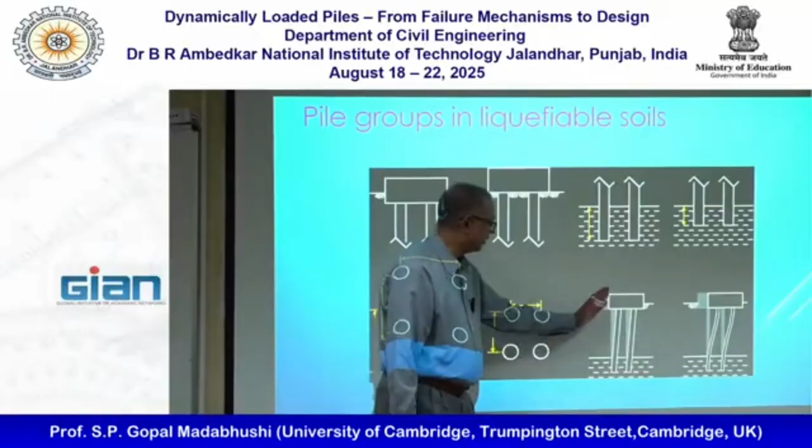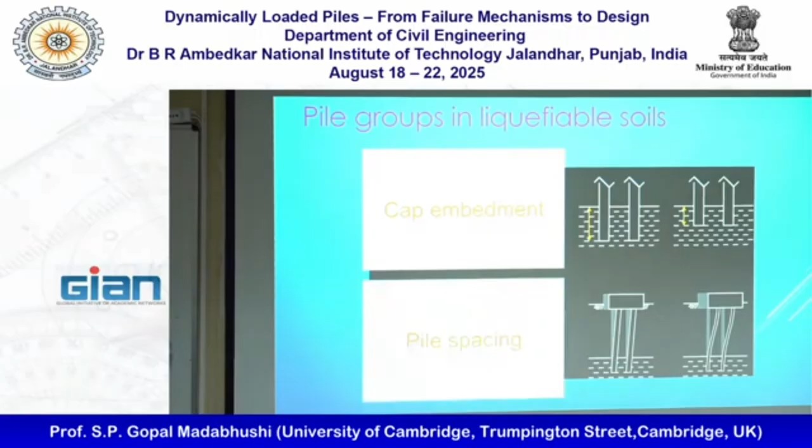Pile groups in liquefiable soils have many different issues. For example, whether my pile cap is above the ground surface, resting on the ground, or embedded will make a difference. The amount of embedment also makes a difference. Spacing of the piles makes a difference, and depending on the spacing, you can get whether the whole pile group will rotate or it can bend. So is it the flexural stiffness that is important, or global rotation that is important? All these things change depending on spacing of the piles: cap embedment, pile spacing, tip embedment, and pile stiffness.

Before I get into this, I want to take you through a thought experiment. Suppose I have a pile cap and, say, a 2 by 2 pile group.

Initially, before we constructed that, when there's no liquefaction or earthquake, what do we expect? We'll have some end bearing, we'll have some shaft friction, and that is keeping the vertical load in equilibrium. This big downward arrow needs to be balanced by these two, and the integrated values of shear stress on all 4 piles.

During the shaking, liquefaction happens, pore pressures rise, effective stress comes down, and you get loss of capacities. You lose some of your end bearing, your shaft friction probably disappears fully, and that gives rise to settlements. But what we don't know is who's keeping the thing in equilibrium. We know there's an external load that's always going to be there, so somebody needs to oppose that, but we don't know who is doing that. That's why it's a question mark.

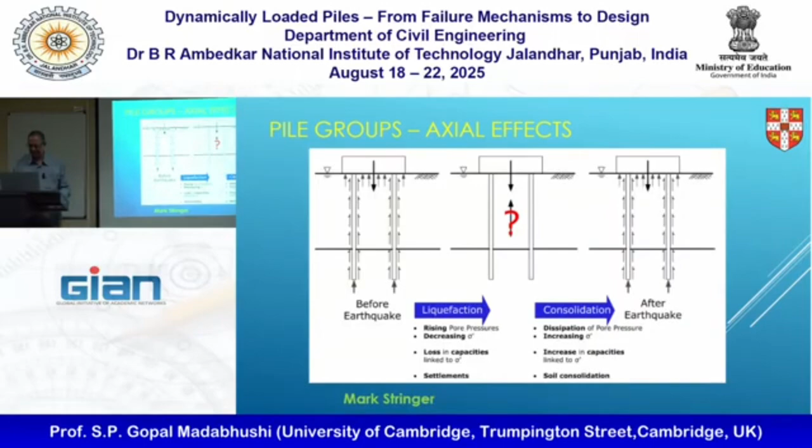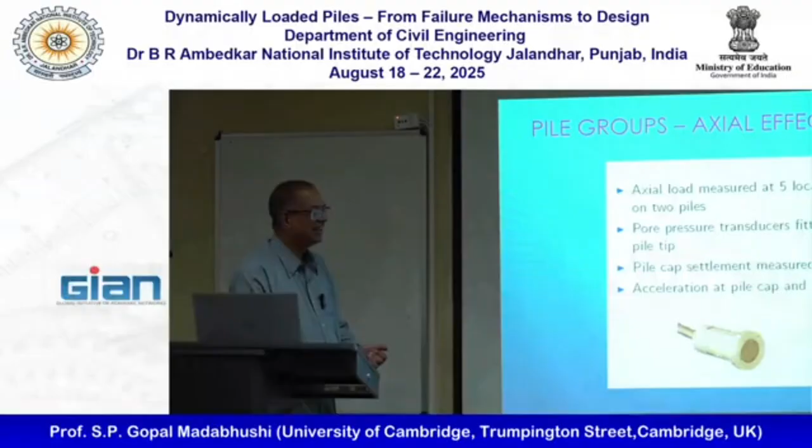I had a student called Mark Stringer, who is now a senior lecturer at Christchurch University in New Zealand. Mark was a gem. He used to work for BP, and got tired of sitting alone on offshore jackup rigs, and said, "I want to come back and do a PhD." I said, "I have this idea, do you want to try and do research on this?"

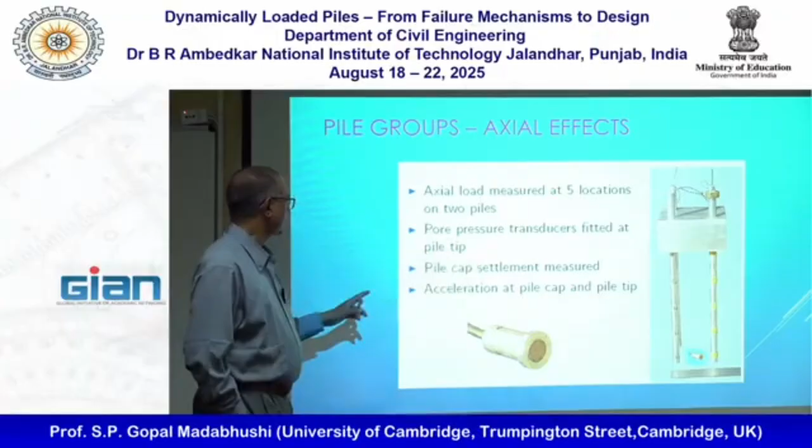So he created this pile group. The base had a pore pressure transducer in it. We had gauges all along, but these strain gauges are designed to measure axial loads, not bending. So we had axial load measurement at 5 locations, and we also had total load cells on top. We of course monitored the acceleration of the pile cap and the pile tip, and the settlement of the whole pile group.

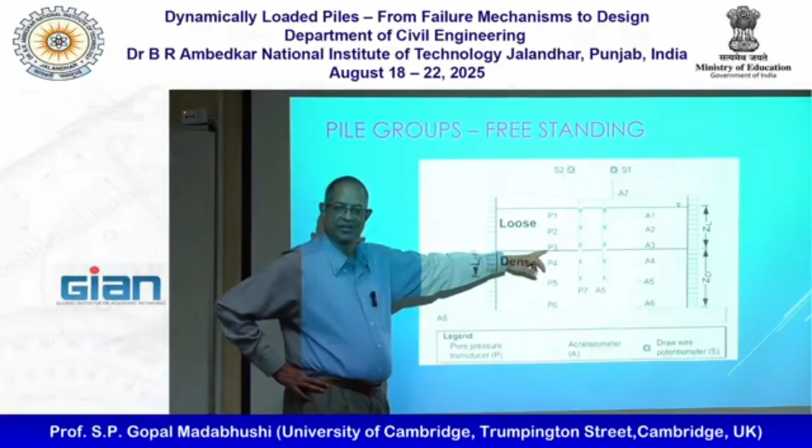The first set of experiments he did involved inserting piles into a soil profile of loose sand overlying dense sand. This is very realistic because you'll never design these piles to end up in just the loose sand - that's asking for trouble. You will always embed them to a certain depth. Normally you work out the effective length you need using, I think, Bond has one equation, Fleming has another equation, that tells you how deep to go - maybe 5 pile diameters or 8 pile diameters into the dense sand. So we followed those rules and installed them to that depth.

And here are all the load cells, effectively load cells. They're strain gauges, but they're measuring axial load.

S1 and S2 are the wire gauges to measure the settlement. A7 is the accelerometer. We measure pore pressures and accelerations on either side.

Very straightforward, the first set of experiments had the pile cap clear off the ground, with a gap at ground level. Normally onshore you don't do that. The pile cap is either on the surface or embedded into the ground. But offshore, many times you leave the pile cap a little free because you may not be able to drive the piles to the depth you want. So it's not totally made up - it's possible, especially offshore, to have a situation like this. We wanted to try that and compare it with when the pile cap is sitting on the ground. So these are what I call freestanding, meaning the pile cap is clear of the ground surface.

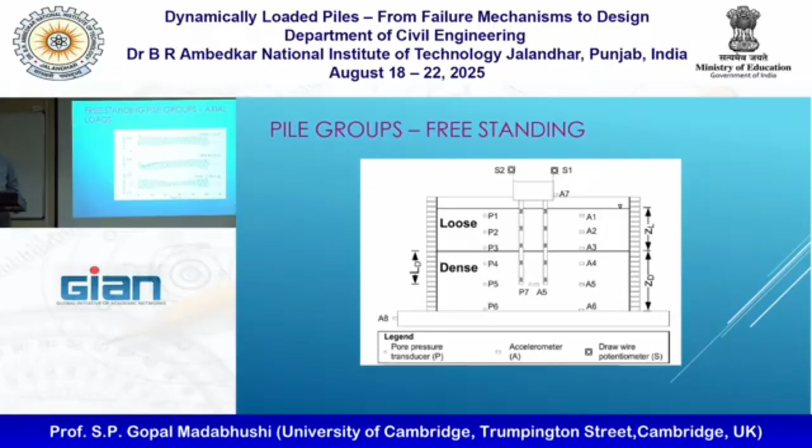Before we look at the shaft capacities, we're also interested in how the load is being generated. Pile loads are seeing increasing load as the pore pressure dissipates, right? So we had...

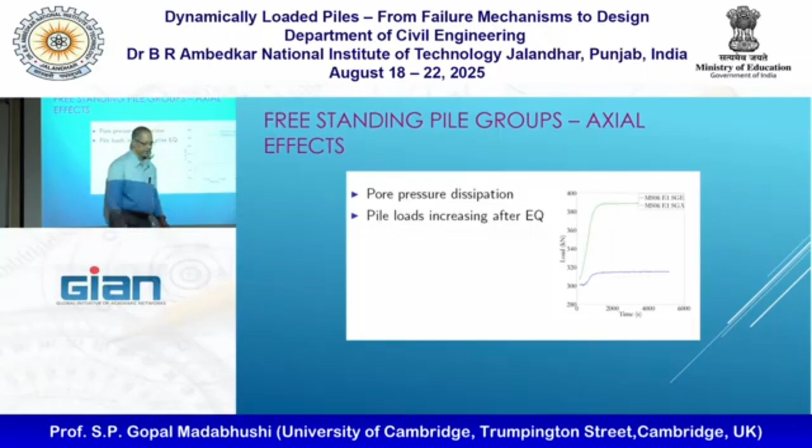Here the cyclic bit is removed and we're only looking at the fairly long term - these are like 4,000 seconds or something, and you can see the green is a lot bigger than the blue, and blue is at the bottom. Let's go back and check that - oh, I haven't marked it here, but I'm pretty sure one is at the top and one is at the bottom.

As the pore pressure is dissipating post-earthquake, we can see these loads are peaking. We can also convert this into the end bearing and the shaft capacities directly, because we know the area of the pile. So clearly during shaking we lose shaft friction, and as the pore pressure dissipates, is the shaft friction coming back or not - that's what we're looking at here.

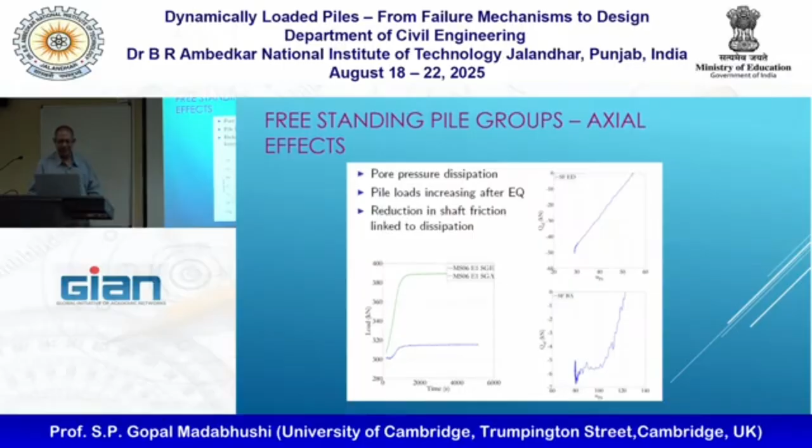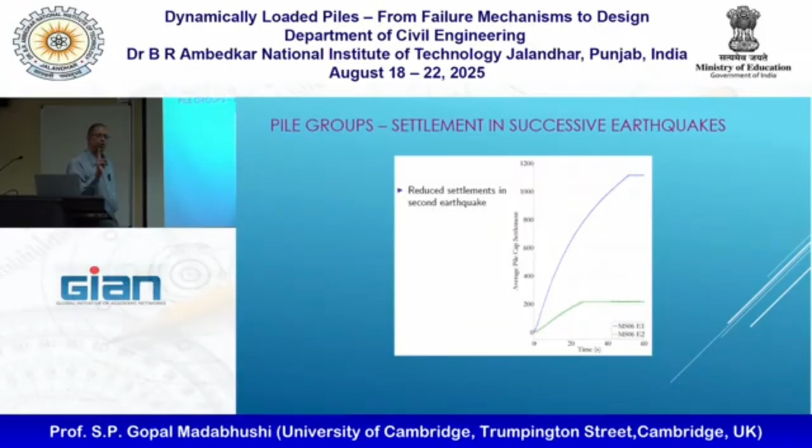Another important thing here is the settlement, and here I'm showing data from two different shakes. Earthquake 1, where I got a massive amount of settlement, nearly 1,000 - almost a meter and a bit. And the second earthquake, similar size, but the second time round the soil doesn't liquefy as much, and also the pile cap has settled a lot, so it may have come into contact with the ground.

But what I'd like to see is - this is much steeper than this, right? So we had an idea: suppose instead of stopping earthquake 1 here, if we continued, what would happen? It would probably be basically what earthquake 2 is, isn't it? We stopped and applied a second earthquake - how is the settlement going to continue?

So I need to stack these one after the other, and this is what happens. This is really beautiful - earthquake 1, the settlement stopped here, and if I put the settlement I got in earthquake 2, it's almost continuing the same thing. There's no field data, no real data like this.

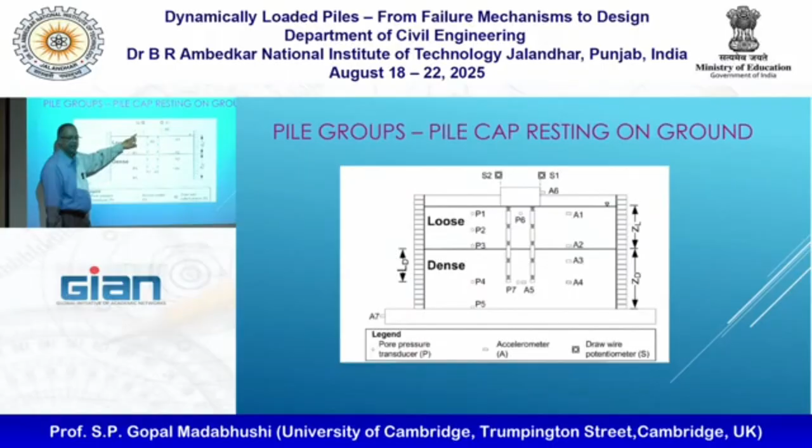In most liquefaction problems, input motion is actually not that important. Once you hit anything above 0.1 g, the soil will liquefy. Whether you do nice swaras in music, or sing different ragas, the soil doesn't really care. It only needs that 0.1 g as a threshold acceleration. After that, it liquefies. You can apply Kobe motions. For liquefaction problems, the input motion shape is not that important. For dynamic problems it is, but for liquefaction it isn't, because the soil liquefies and the structure does what it does.

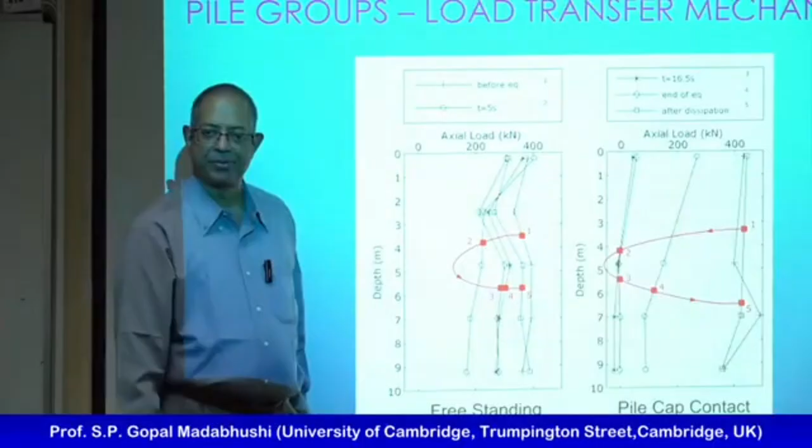When the pile cap is in contact, starts at 1, comes all the way to 2, 3, 4, 5 is the recovery - this is the post-earthquake reconsolidation. And these values are pretty close to zero. I said, what's going on here? Basically, this is the same data as what we have seen before, except now we are plotting the loads along the length of the pile.

And then the penny has dropped in our head. Basically, if my pile cap is not in contact with ground during this particular earthquake, the total load being applied on the pile cap - somebody has to carry it, right? So it can only come down to 200 because that load has to be carried through all the elevations of the pile.

Whereas when the pile cap is in contact, the piles completely don't carry any load. So who's carrying the load? The pile cap, right? So whether the pile cap is free or in contact makes all the difference on the load the pile is going to see. From equilibrium consideration, this is right, because somebody has to support the load. Whereas here I got the pile cap to carry all the load, so the piles are completely unloaded during the earthquake.

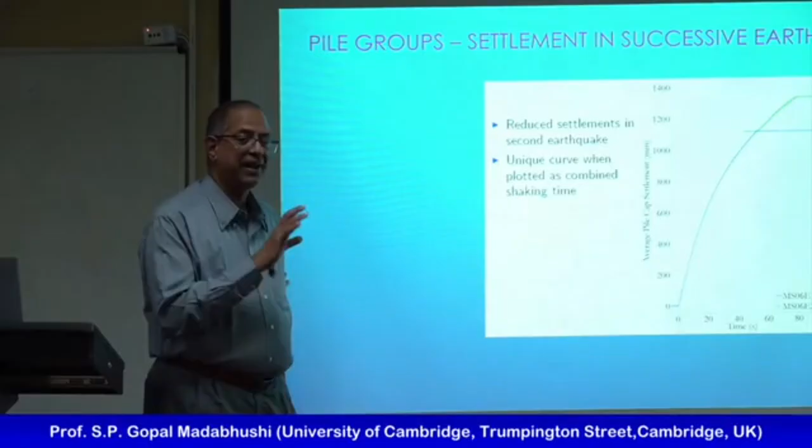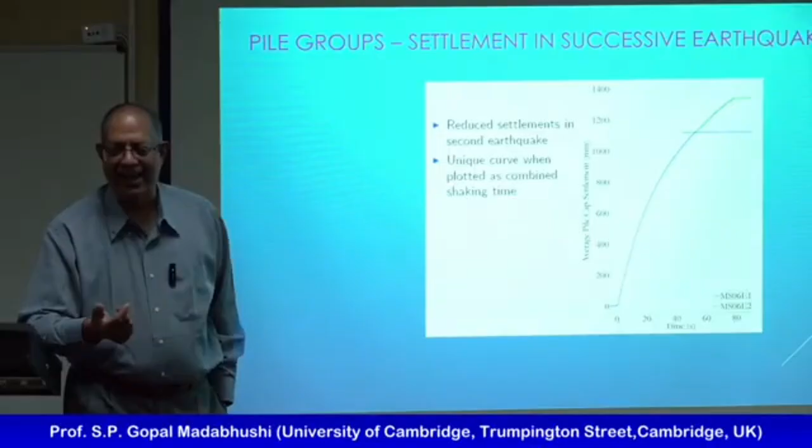If I have my freestanding pile group where the cap is away, the piles are carrying 200 kilonewtons in liquefied soil, which means that they will mobilize a lot of settlement. That's the only way it can generate enough resistance to support the load. Whereas the other one, the settlements will be a lot less.

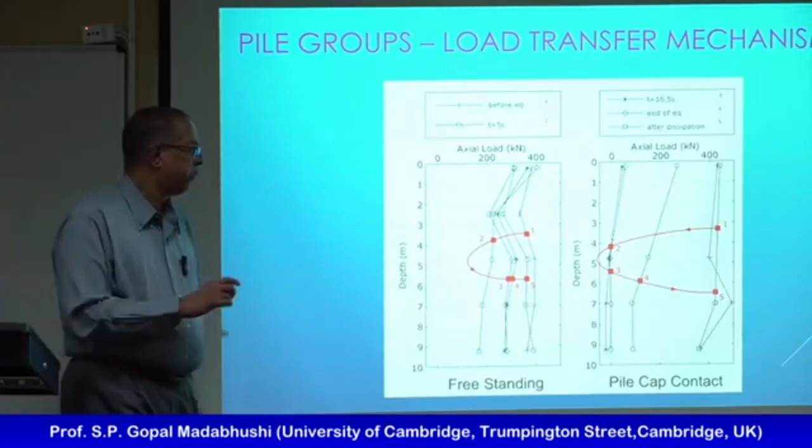And this is quite a revealing set of experiments. So here the settlement will be less, but you are basically relying on pile cap.

So what routinely designers are ignoring is what is saving them when this ground liquefies. And there are many examples where routinely, if you have liquefiable soil, you drive piles to go into dense sand below. Even Delhi's Akshardham temple had piles like this. So many examples I can give.

So when the earthquake happens, the bit they ignored in their design is what is going to save them, which is a bit scary. Because as a designer, you are saying, this is not going to be important for me, and I'm going to ignore the pile cap capacity.

And that is the bit that is actually holding your structure up when the cap is in contact. Otherwise, if it's freestanding, you'll get a lot more settlement, like 1.5 meters, by which if I got 1.5 meter settlement of pile, my structure is more or less destroyed by that amount of settlement.

Yeah, but what if it is a reverse case? Like it is pile cap resting on the soil. After first earthquake, the soil is going to sink. Yeah, and along with the pile. Not along with it only, because the pile is socketed in the rock. Then, as I said yesterday, the problem now becomes a buckling problem. If you, this is the problem with soil, right?

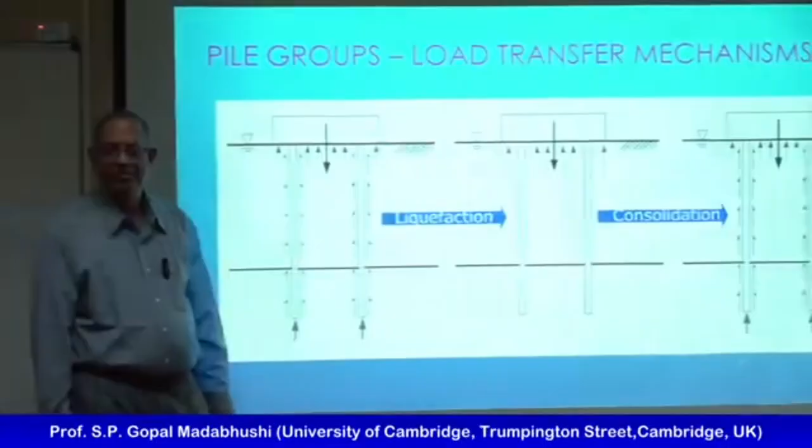So have you seen that film? Not Catch Me If You Can. They rob the bank and all that kind of stuff. Anyhow, there's a film called Now You See Me and Now You Don't. So he applied that to this pile foundation and it kind of stuck with us.

So this is really where centrifuge testing can reveal the load carrying ability of piles and how the load is getting transferred to the soil. If I now know this is what's going on, I can design. All I need to do is make sure that the pile cap has enough capacity, right? So maybe make the pile cap half a meter bigger in every direction, I'll have enough capacity.

So although we started these experiments for fun, more or less, just to see what's going on, once you get the data and look at it carefully, as I said, we went through quite a lot of thinking to go with this.

There is also a case where an early version of this data we presented at a conference in Greece, and there was this Japanese guy in the audience, and all he got stuck on was: no pile caps, the pile settling 1.2 meters, unacceptable. He stood up and walked out of the audience. And my student who was presenting this got very angry, and he said, 'This 1.2 meter settlement is not...'

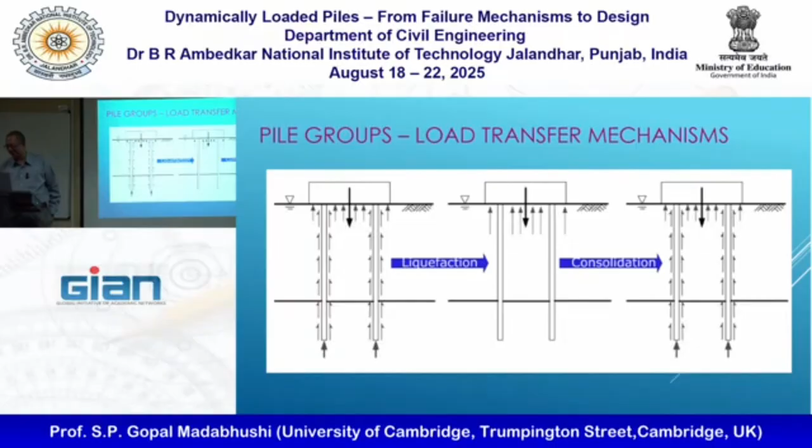Okay, any questions on the axial capacity? Did you guys find that interesting or not? Very little work is there on axial load carrying capacity of piles in liquefiable soils, by the way. Even my book - this work happened after I wrote my book, so it's not in there. There's a new book Kaynia has published, Amir Kaynia wrote, and I contributed a chapter for that, and we included this work, also published in Canadian Geotechnical Journal. So it's out there, but you need to look for it.

Any questions? Pure horizontal. Yeah. Making it inclined and all that will make it a lot more complicated.

And that's the bit I'm going to talk next. This is after the Christchurch earthquake, and I had a student called Jenny Haskell who looked at lateral spreading, which I'll talk about now. What I want to convey is the excitement of research more than anything else. This is how you can go about it, and these are all - we're not doing research for fun. These are real problems and they have real consequences.

Sir, actually, normally once it is reaching critical state, sorry, the volume remains the same. Beyond critical state, yeah. While driving itself, if you are adding more vibrations, so soil will settle? Not necessarily. When you do pile driving, what you expect is at the base of the pile, or the pile tip, that soil would have reached the critical state. In driving, because you have to fail the soil to get the pile in.

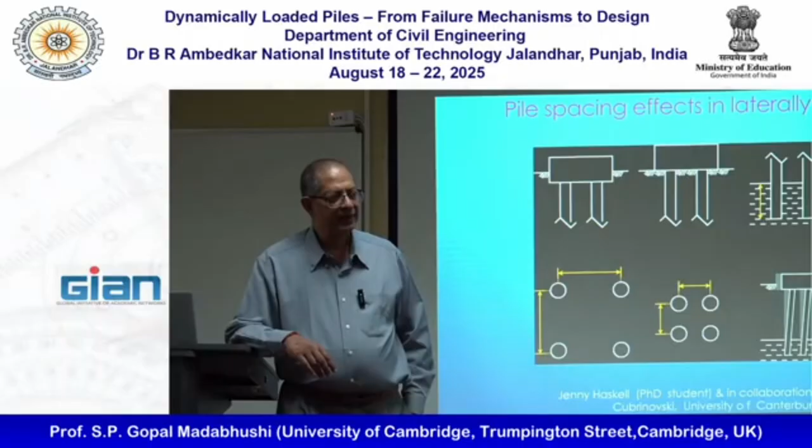Also, in pile raft design, we include the capacity of the raft in that behavior will be the same. No, pile caps are much smaller, usually only 3x3 or 2x3 pile arrangement to go under the column. Pile raft is a different beast - you got the raft covering the whole building area and you got piles. The big question is how much of the load is carried by the piles, and within that, how much is end bearing, how much is shaft friction, and how much is carried by the raft.

Now, routine static design, I also recommend pile raft for many problems, in consultancy problems in Kakinada for example, where the structural designers don't understand pile raft foundations. So whenever I say go do this, they'll say are you sure? And I say yeah, I'm pretty sure that's how you do this.

The load sharing between the pile cap or pile raft and the piles is a real interesting one. People like Randolph over the years have come up with springs, pile as a spring, the beam on Winkler foundation type of analysis for the raft. In the end there should be strain compatibility - if the raft is going to bend, the pile also needs to get pushed down, and you work on that strain compatibility between the pile and the raft.

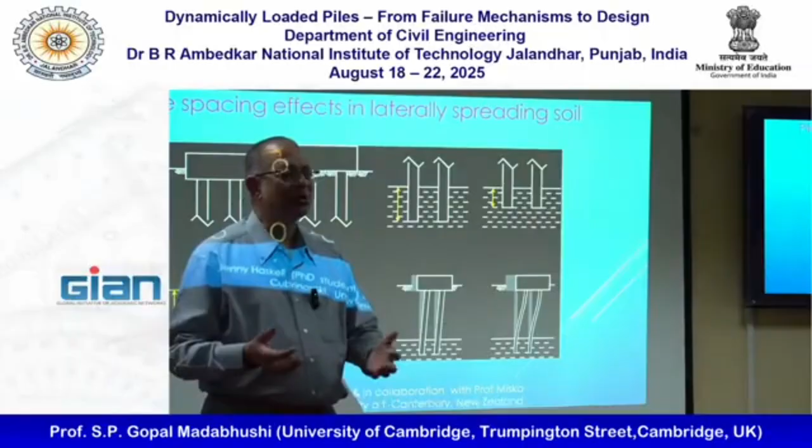Again, most of the stuff Mark Randolph has done is to do with imagining all this is elastic. Yeah, we know the soil is not elastic. Therefore there's a lot more work to be done, even for static, which he had a bunch of students work on, and he did quite a lot on that.

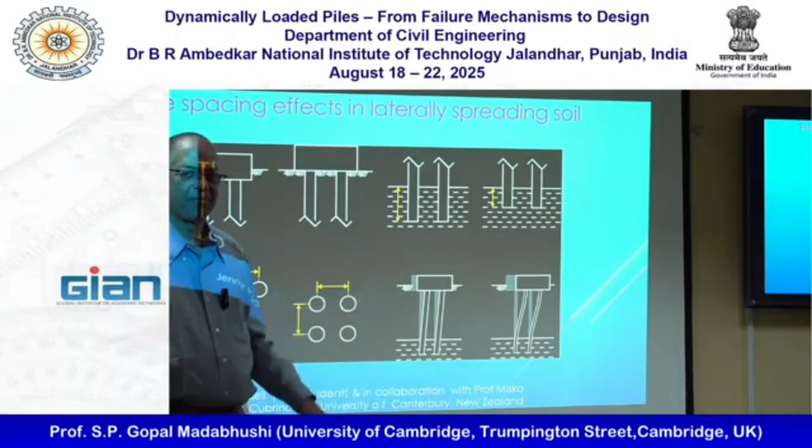If I were to look at raft foundation with piles in liquefiable soils, that is going to be even more interesting. This is just a precursor for that. So when I get a next bright PhD student, that is in my mind to go and do that. I haven't done it yet, so I can't answer. But you're right, pile rafts are a different beast, and the load sharing is going to be very interesting.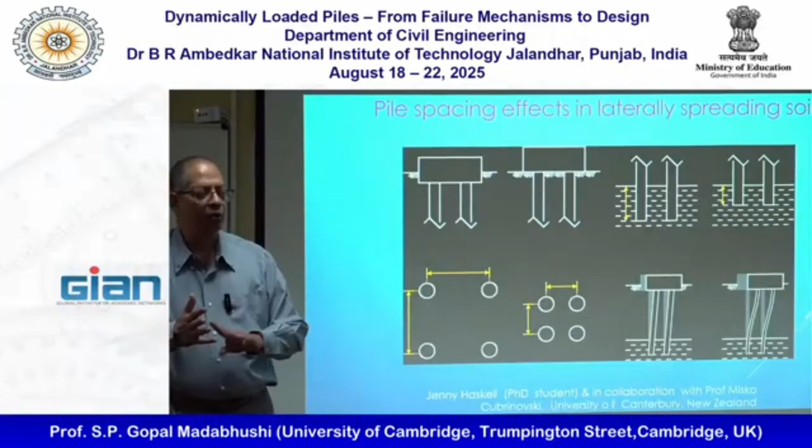So the problem is piles. Here I'm focusing on pile spacing. Typically, pile spacing is anywhere between 5D to 2.5D - that is the range. You don't normally design 10D spacing, that is almost designing like single piles. 5D is the upper limit, 2.5D spacing is the lower limit.

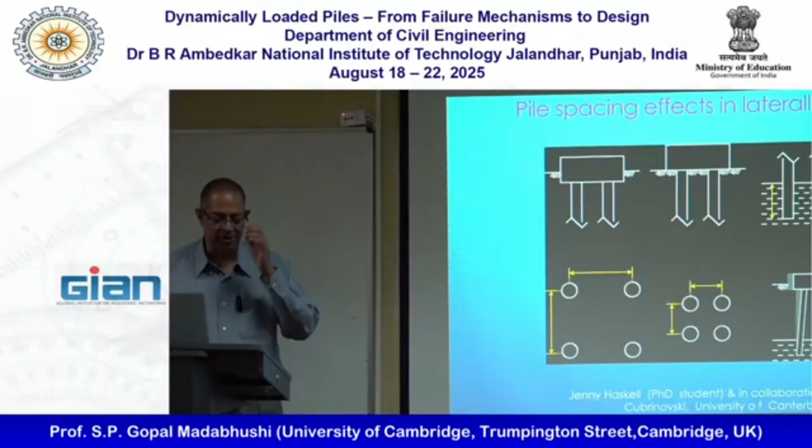So when Jenny showed up, we thought we'll look at this because as she started her PhD, this Christchurch earthquake happened, and Misko Cubrinovski was interested in this. So cap embedment we dealt with for level grounds. Now we are looking at pile spacing. The other ones we will do later.

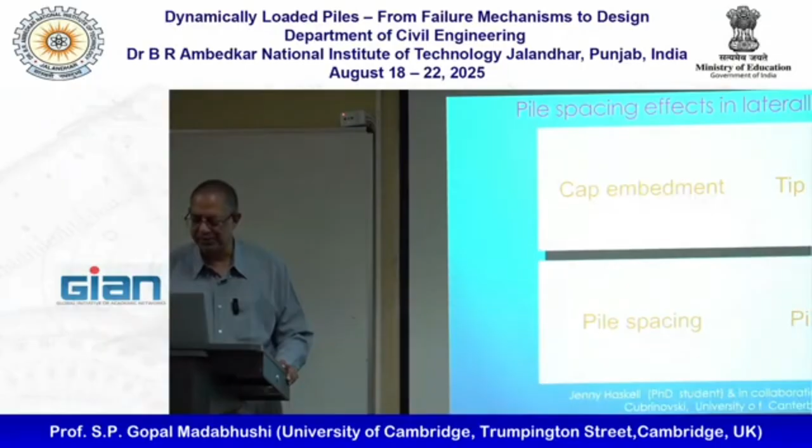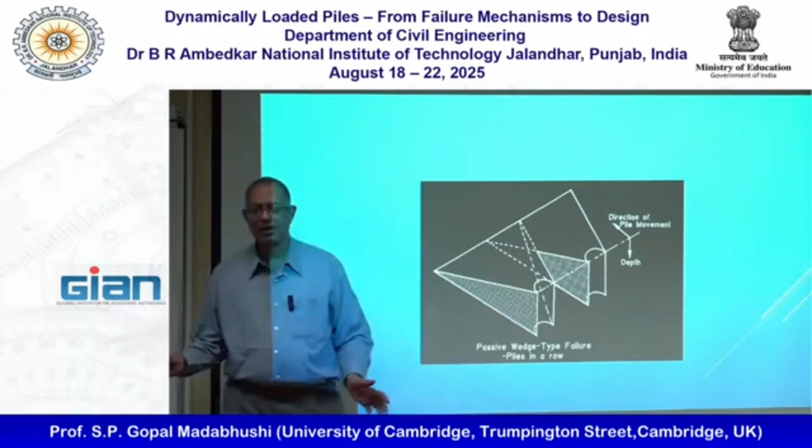Typically what you expect is that if I have piles and I have sloping ground coming, trying to spread past the pile - I showed you some field examples from the Taiwan earthquake in the last 2 days. You expect passive wedges to form behind the piles. If the spacing is close, these wedges will overlap, so the amount of load I'll attract will be less. If the spacing is large, then these wedges are pretty much on their own, so the load I attract on my piles will be big. So that is conventional wisdom.

There are also things like if the free field soil is displacing with increasing amplitude towards the surface, the soil in between the pile group may move less because most of the load is being carried by the pile. So it will flex - say if it's a flexible pile, it does something like that, but these displacement vectors will be smaller than this. We don't need a centrifuge test, we can guess this is what happens.

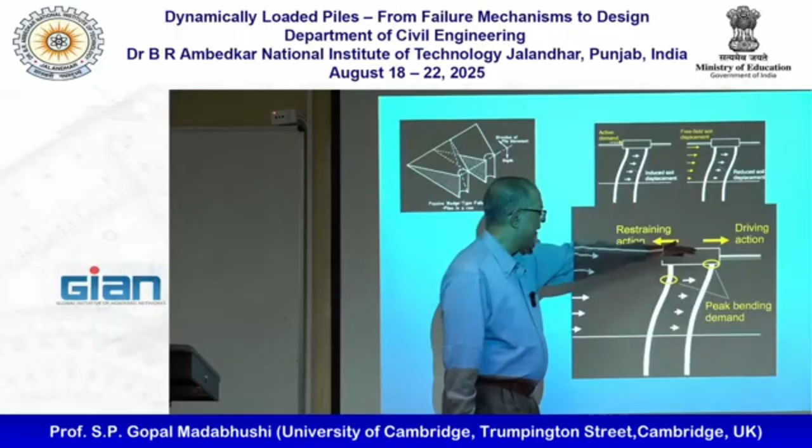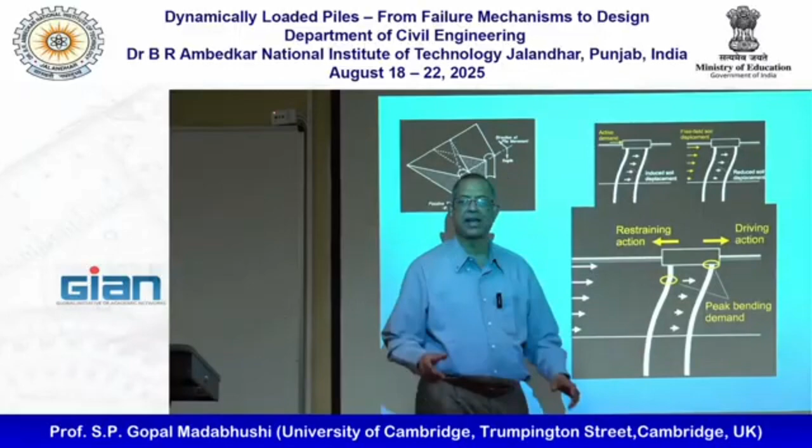Also, we talked about formation of these hinges, so we do get the peak bending moments somewhere like that, which we looked at yesterday. Effectively, the New Zealand code talks about restraining action and driving action - the earthquake creates the driving action and the structural stiffness provides the restraint. It's like a frame action, right? Basically a pile group with a pile cap is like a frame.

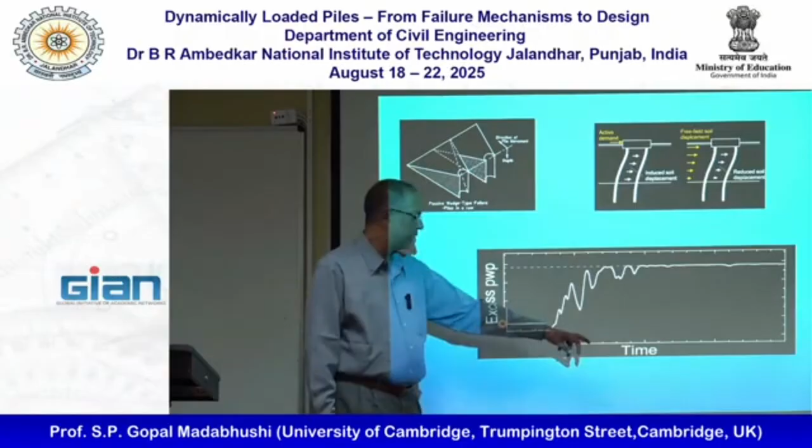Now this is - I probably showed you this already. Typically this is what we are worried about: the excess pore water pressure will, once the earthquake starts, build up and stay like that until it starts to dissipate in the post-earthquake period.

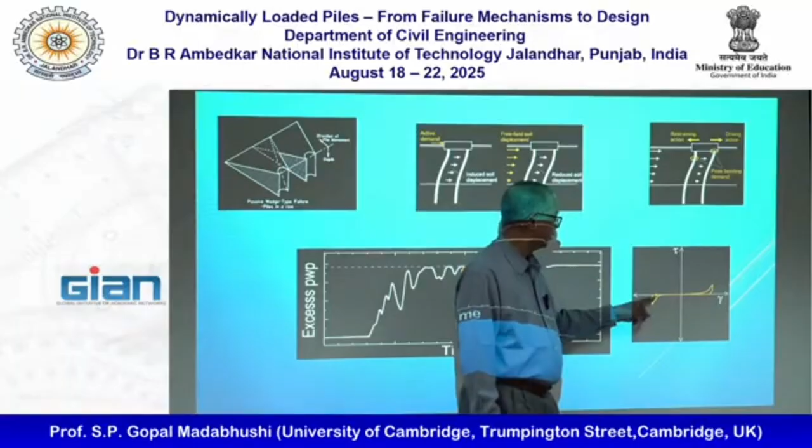So I think I showed you this animation already. You got initially stiff response, and as the pore pressure builds up, the tau-gamma loops widen up, and as it goes, they become what they call banana loops, where the tau-gamma response is almost flat, but at extremes I get dilation to create this stiff response.

So we wanted to model this in the laminar box. I needed the laminar box because when I shake this, the soil wants to move from upslope to downslope. So if my ends are even ESB model container ends, while they match the shaking, they can't deform with the soil. So laminar box is required for this kind of lateral spreading problems.

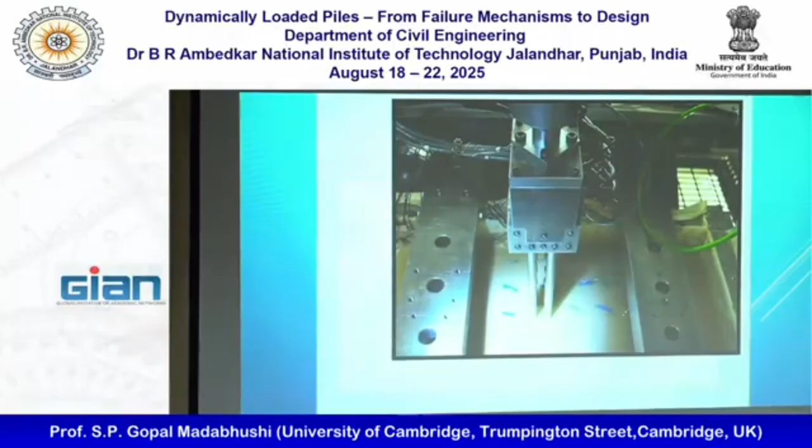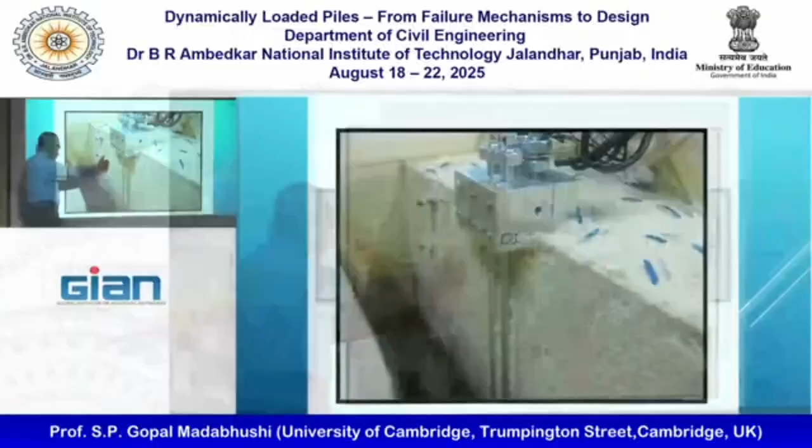And then you drive the pile. This is obviously the 2D spacing pile. And then you put it on the centrifuge and do the test. Then post-test you can also excavate and see where this ended up.

So you've got some base layer, which is dense sand, and the liquefiable layer. In this case, our pile cap is always embedded into the soil, so we are not worried about the settlement issues like what I've shown you earlier. So when I shake it, at the end of it, it will do that.

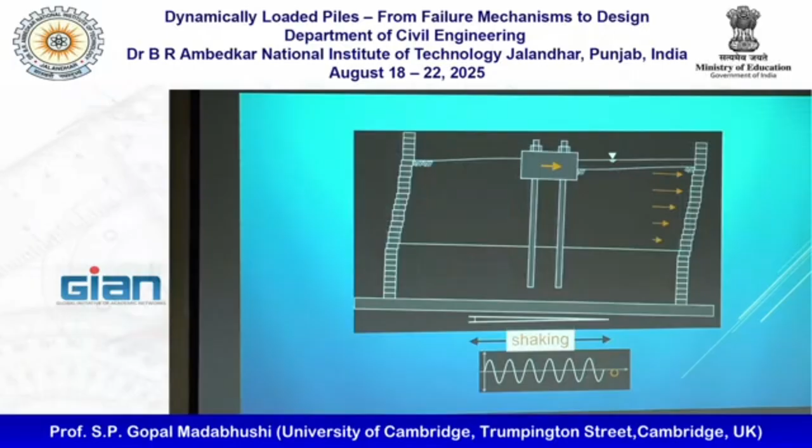This is an animation she created, but I can show you pictures afterwards. Basically, each of these rings can slide on the next one, which means if the soil wants to go there, this will simply follow it.

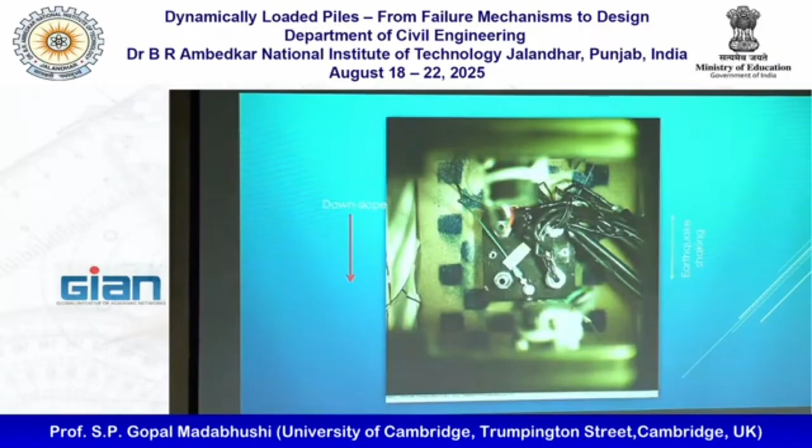This is a cool video. This is the plan view, and this is the first time we had a high-speed camera. This camera is taking 1000 frames a second, so although I'm shaking it quite fast, I can still capture and see what happens during the shaking. So that's the plan view.

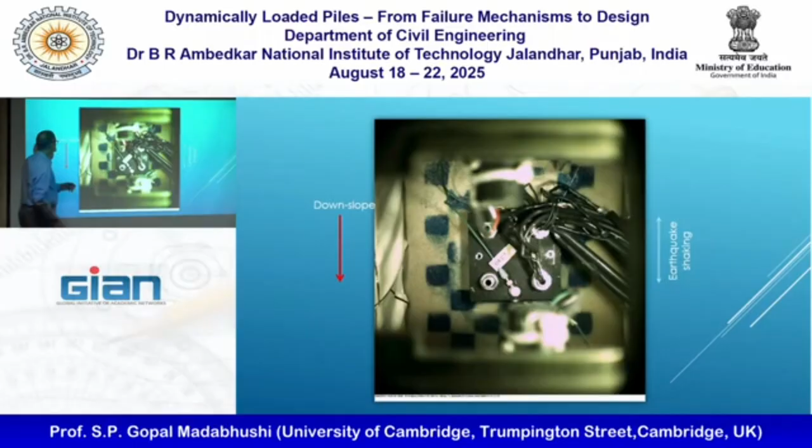The 4 piles are going in, and this - sorry - the slope is high there and down there, so we expect the slope to move in this direction. So I hope this plays.

Okay, so that is what has happened. You can now see that this whole pile group started there and moved. I'll replay it again and you can mark the initial position. So it's there, right? And after all the cycles of the earthquake, it has ended up here, right?

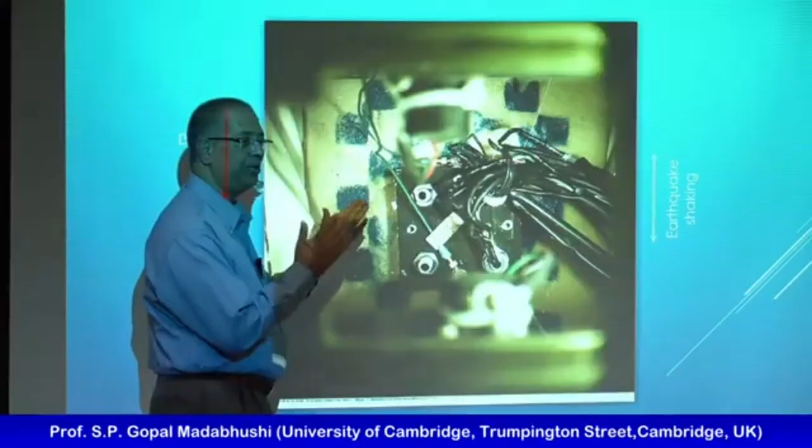We can also see the soil that is coming here is being stopped by the piles. So these squares don't deform, whereas these started to shear on the sides of the pile. So just having squares, we can see where the strains are.

Okay, then we can look at the data itself. So that is visually good, but what you really want is to look at the data. This is all in dense sand, so nothing much happens. In the loose sand, I'm looking at the pore pressures.

You start getting big acceleration - sorry, my mistake. Input acceleration within the dense sand, nothing happens, but in the loose sand you get these big spikes. And at the surface, the whole amplitude drops off, because if the soil turned into liquid, accelerations cannot go up, which means the top layer will get isolated.

But why are these things so big is the question. And that is because of the thing I've shown you this morning. When I'm at zero stress state, if I try to shear the soil, it will have to go along the critical state line, and therefore it has to create a lot of suction. If it creates a lot of suction, the soil temporarily stiffens, and therefore it can pass big acceleration.

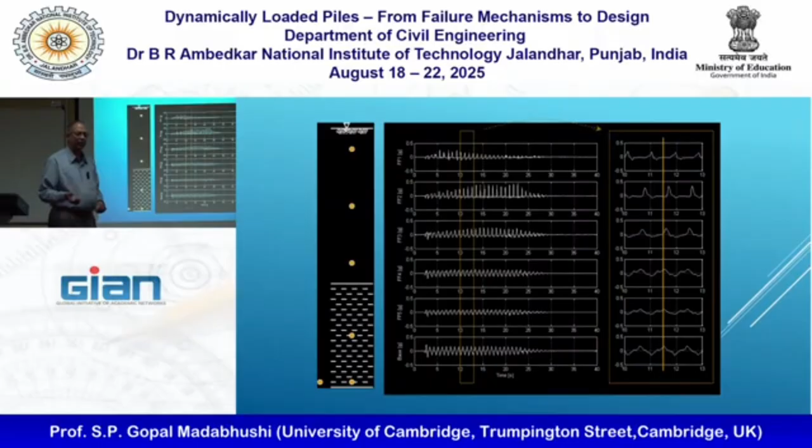Now we can also take a little time frame here, like a yellow box, and this yellow box is plotted here, so I'm only seeing a few cycles. Then if I draw a vertical line, I can see the delay in the propagation of the shear waves clearly - that's the phase lag I'm getting as the shear waves go from bottom to top. So there's a lot of information you get: if I know the delay, I can work out shear wave velocity, and if I can work out shear wave velocity, I can work out what the reduced shear modulus is.

All that information is coming straight from the accelerometers.

Pore pressures. In the dense sand, I get maybe 60 kPa excess pore pressure. But if you work out to liquefy the soil, I need about 80. So this dense sand hasn't quite liquefied. As I go to the top, I can see I'm crossing the liquefaction line. So we know the shallow layers, the slope layers, are all liquefied.

Now, earlier I said that we are getting this deliquefaction shocks. That is confirmed here because the pore pressure is not just going up. In every cycle, it is dilating, or it wants to dilate, and you get suction. And I can see the suction. So that is, say, 35. I'm getting a suction of about 15-20 kPa. And it's even more there relative to the shallow depth it is. So that's why the soil is locking on us.

So we see the acceleration response, but also confirm that with pore pressure response. Okay? So this all fits together. Great. This is what doing experiments is all about.

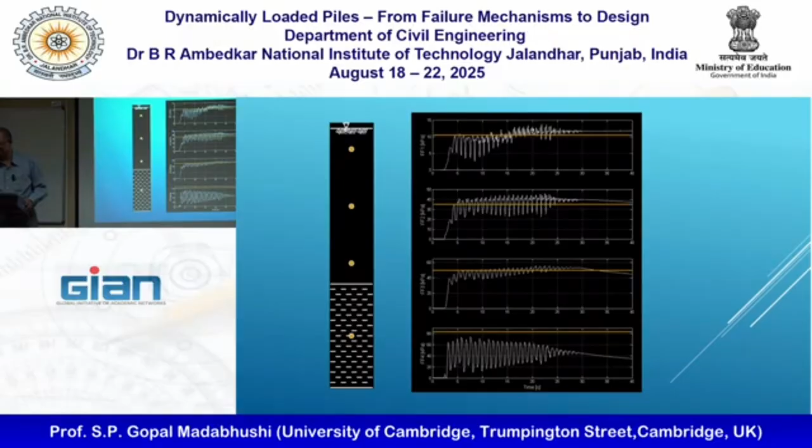But really, we are trying to answer a design problem, right? So here, the piles are also gauged with strain gauges, so we can measure the bending moment. So I got 5D spacing and 2D spacing. And this is the upslope pile, and that is the downslope pile, right? So basically what we are saying is...

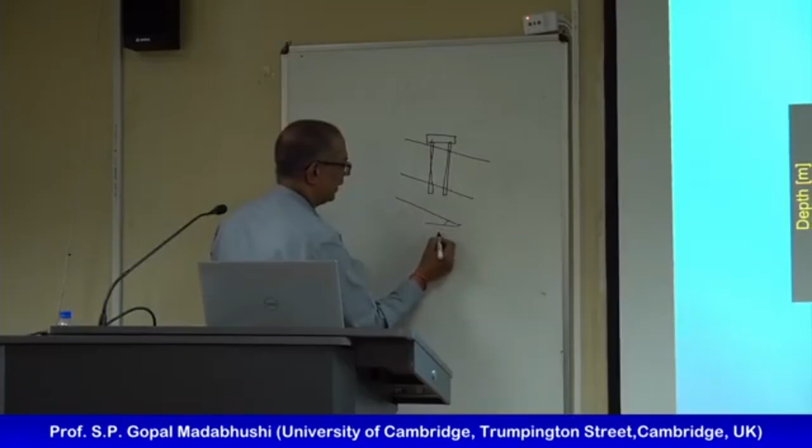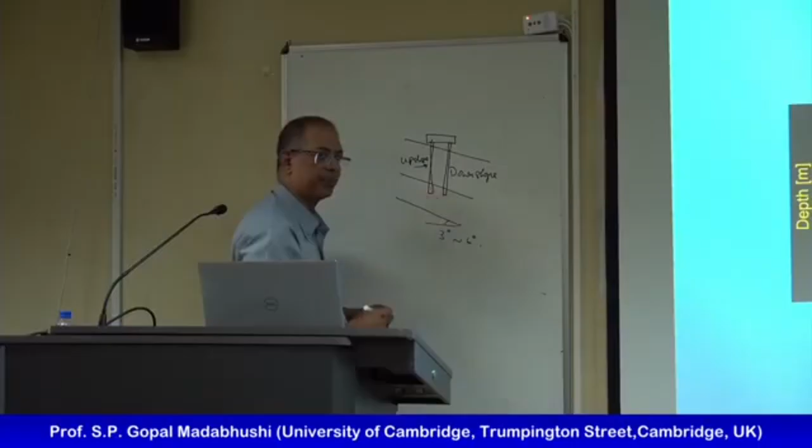And the slope angle is 3 to 6 degrees in different experiments. Okay, so this is my upslope pile, and this is the downslope. So we are looking at the bending moments in these. So at the base, obviously the bending moment has to be 0 at the tip of the pile, and we get a shape. If I plot these bending moments at a particular instant, a shape like that.

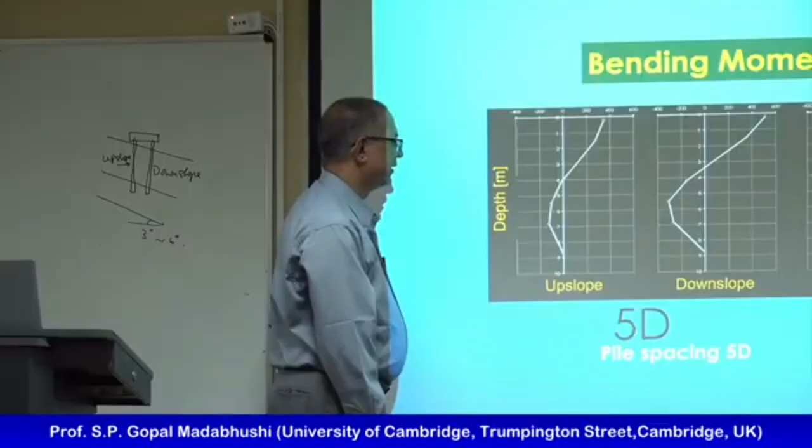And the downslope one, this is about, let's say, 300 kilonewton meter, and here it is about 500 kilonewton meter. So clearly the upslope and downslope are not carrying the same bending moment.

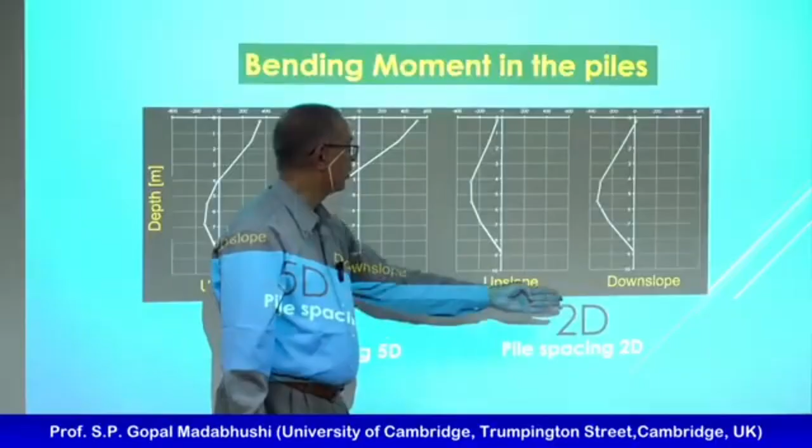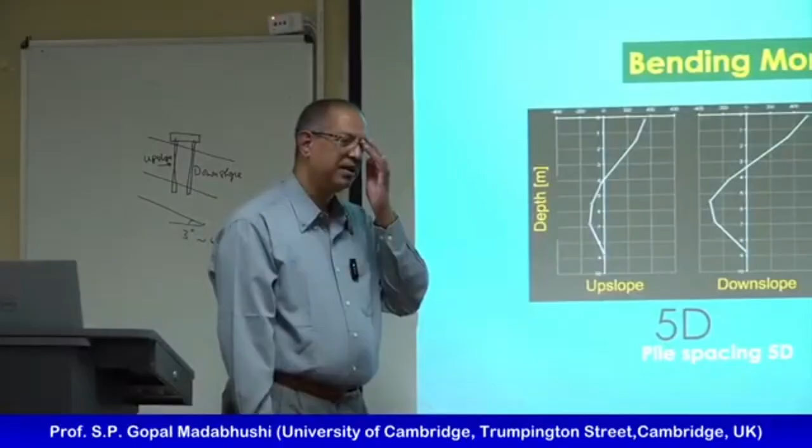When the spacing is reduced, base and also the top are almost 0. And I'm getting a different shape, right? So this one is a double curvature like this, and that is simply one same shape, both for upslope and downslope, and also they're not that different. Why is this? The only thing we changed is the spacing. What is it trying to tell us?

Sorry? No, pile cap is embedded for both cases. It's only spacing that is different, right?

Yes. Yeah, but the 5D spacing means I'll generate individual wedges according to what I said before, right? Actually, it is to do with the mechanism, right? When the spacing is big, if I draw the plan view, the soil is able to flow like that.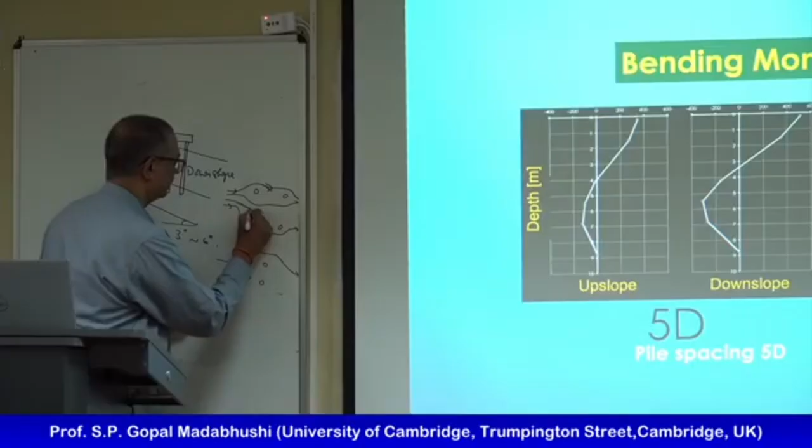If the spacing is less, the soil does that. Oh, sorry, I can do that. So if the spacing is less, it's almost working like a one large diameter pile. Whereas these ones, it can go around the upslope and downslope, the top and bottom piles separately.

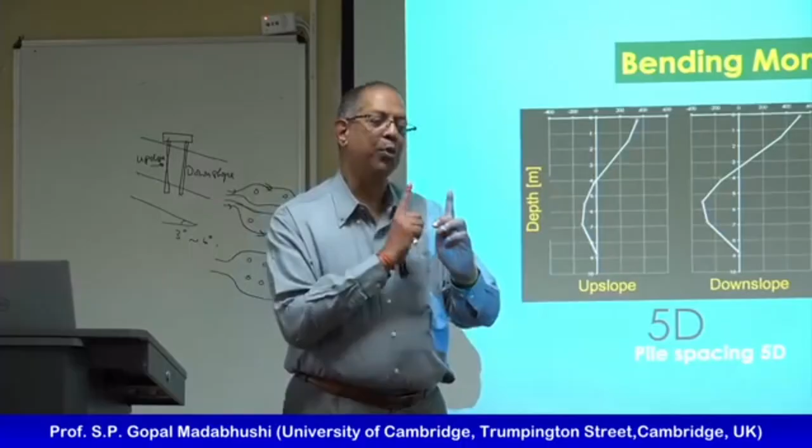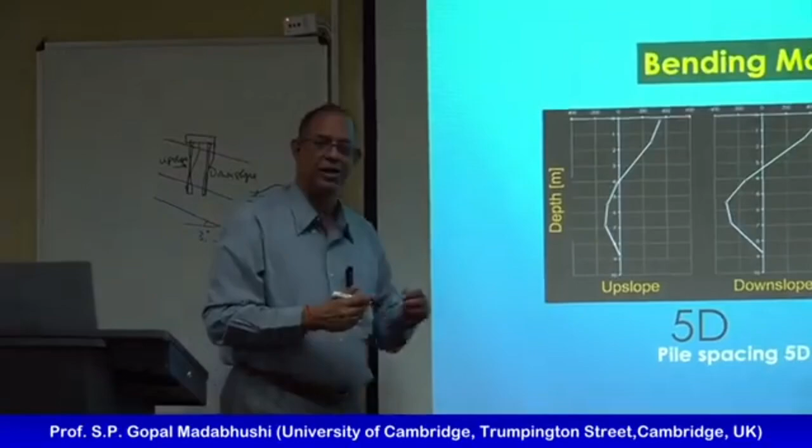Which means in one case, the whole pile group will simply rotate. If it does that, the bending moments will be small. If I have more spacing, then the piles will have to bend like that, right? That creates a lot more double curvature and bigger bending moments. Simply by changing spacing, we are changing the failure mechanism.

So closely spaced piles will act as one large diameter pile, great, but they also are vulnerable to rotation. Whereas widely spaced piles more or less act as individual piles. This type of thing doesn't happen in static loading. Spacing means, if you look at Poulos or Randolph's work, what they say is that the amount of interaction between upslope and downslope piles will change.

That's all that will happen. The whole mechanism doesn't change for them because the soil is never going soft. For us, the soil is kind of turning into mush, which means the failure mechanism can change. So this is the beauty of earthquakes and dynamics. We actually change the failure mechanism because the soil is able to, and you can't have the same for static cases.

So getting the data plotting like this is one thing, but to delve more into it and get the essence of that out, for that we need to understand the failure mechanisms, and hence the title of the course. You cannot do this, you can't look at the dynamic loading on piles without knowing failure mechanisms. You can have a go, but you'll make quite big blunders if you do that.

So we did post-test site investigation to get the deformed shape as well. So we got data, we got the pre and post test configurations.

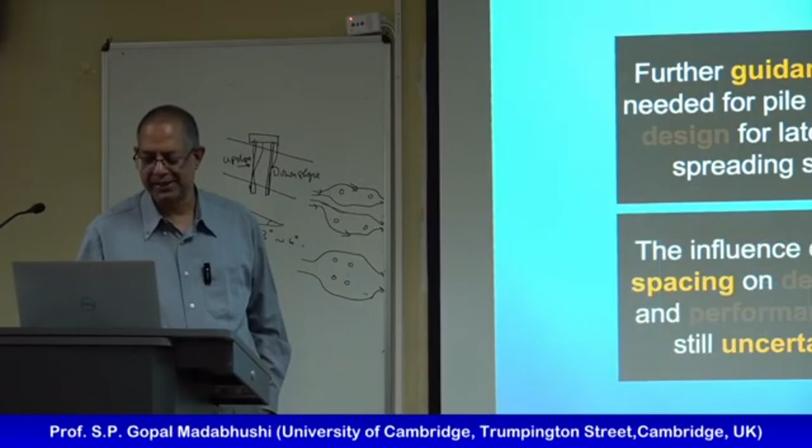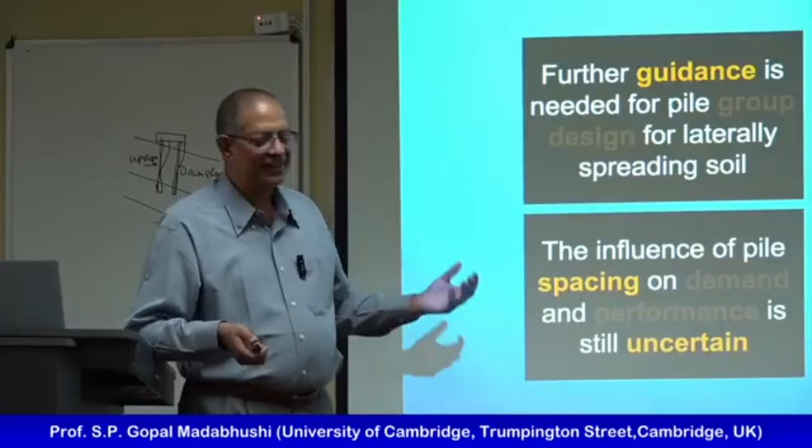We really need further guidance for piles in laterally spreading soil, especially when they're in pile groups. Spacing, we've done the two extreme spacings, right? Where does the bending translate into rotation? People can do more experiments between 5D and 2D, maybe 3D, 2.5D. We haven't done all that. You kind of pick the lowest hanging fruit and say, look, that is interesting, and move on to another problem. But to convert that into design guidance, I need more PhD students who can do those in-between tests as well. And one of the problems in Cambridge is we are always having exciting new problems. We never go back and fill the gaps.

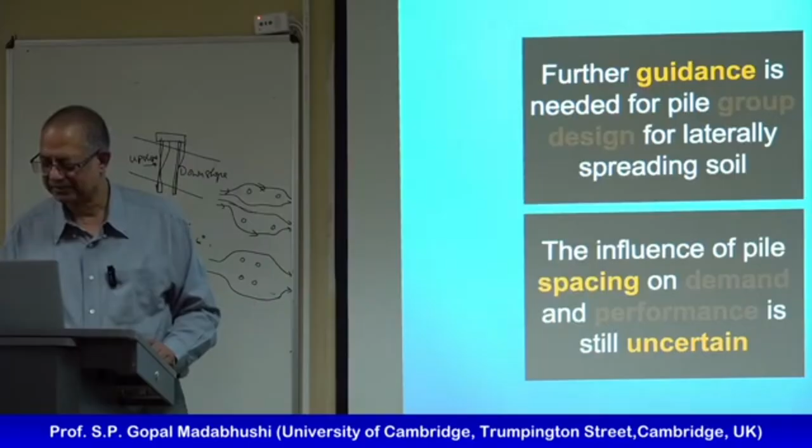Okay, that's all I wanted to say. Any questions you have?

I'm very much curious to know how you are maintaining the density experimentally. How you are maintaining these less dense soil at the top and more dense at the bottom.

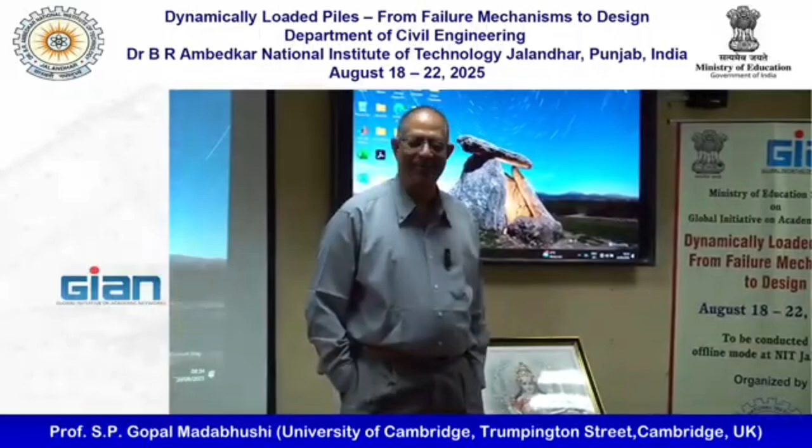All these things, I spent way too long in the lab compared to my family when they were growing up, particularly. We built an automatic sand pourer which will actually pour the sand. You can control, it basically controls the flow rate of sand and also the height of drop. Just like a 3D printer, it goes and pours the sand and you can choose the height of drop and the rate of flow of sand, and it will make dense and loose sands. So there's a machine to do that. It's like a 3D printer.

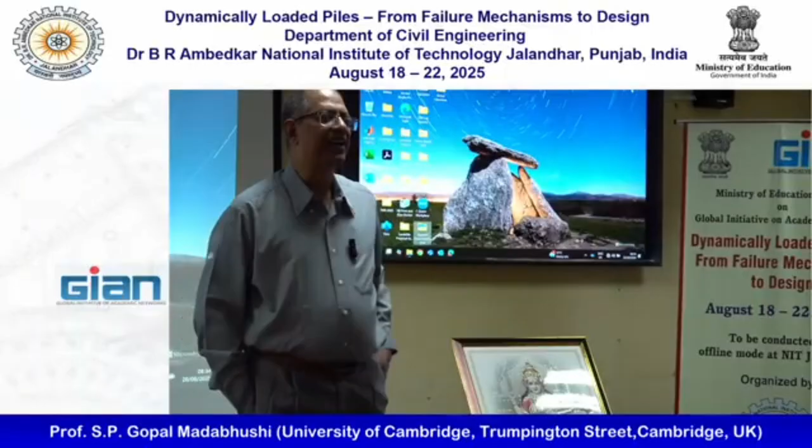So you use different size of mesh for the density? Yeah, the hopper has a little wire mesh on it, and there are papers where we wrote about how you calibrate it to get a particular density. But it's been in use for the last 20 years now. The current students simply know what they do, calibration first in set volume cylinders, and they know exactly what density they'll get.

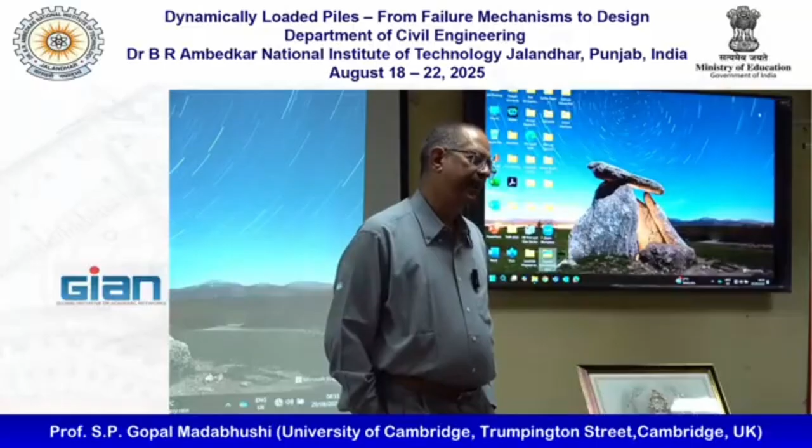And you weigh the model before and after, you know how much sand you poured, so you know the volume, you confirm you got the density as well. On top of that, these days we also push an in-flight CPT to confirm that the loose sand, where the dense sand is coming, where the increase in CPT resistance comes, all that is there. A lot happens. I'm not showing everything, otherwise I'll be here for 3 weeks.

Even saturating the models with methyl cellulose, it's all a computer controlled process. There's a thing we developed called CAMSAT, which keeps the flow rate small enough so that you don't fluidize the sand and slowly lets the fluid in. It takes about 8 to 12 hours to saturate these models because you're trying to saturate them with 50, 100 centistoke fluid, right? So it's going to take a long time. When I was a student, we were doing it manually, and I would stay all night long in the lab. And I thought, this is ridiculous. So we built a machine that will do that. So, yeah, we improve slowly.

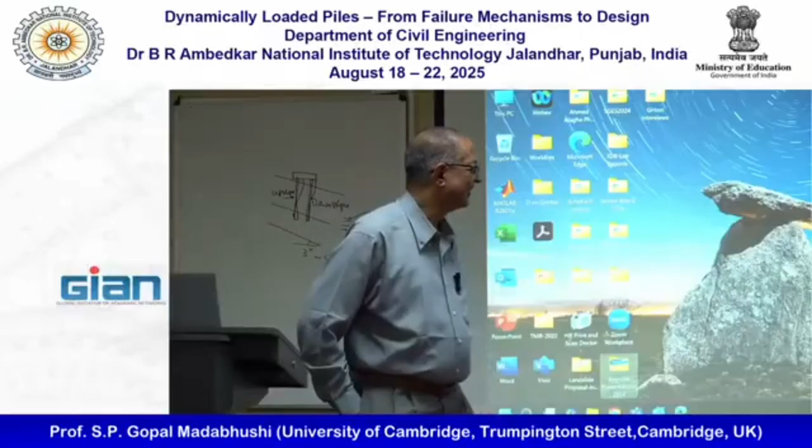Okay, anything else? There is something called the shielding effect, pile groups. So, how does that affect spacing? Shielding effect, like piles in upslope and downslope. Yeah, because of the piles in upslope, there is effect on the downslope. So bending moment changes. I mean, like there is an effect. So, is there any effect in spacing? Yeah, that's what we're talking about, right? No, I mean, like, how does that affect?

Not as much as in the static loading. Because you're resetting the stiffness of the soil. In static, say, a slope is there, and you apply lateral load, the upslope piles take a lot more load than the downslope piles because most of them are the ones which are opposing the movement, right? And that's what you're calling shielding. This is all done by Randolph long time ago. What we have here is initially we thought that is what is going to happen, and then discovered actually no, because once the shaking starts, the soil stiffness is getting reset. So you don't get the same level of protection for the downslope pile. More than that, the global rotation mechanism has taken over. So when we reduce the spacing, because all the piles are connected through the pile cap, it's easy for it to rotate, and the whole bending moment has gone down in all piles. So that's why these liquefaction problems are interesting. You're starting with soil that is stiff and you're resetting it.

Yeah? Okay, anything else?